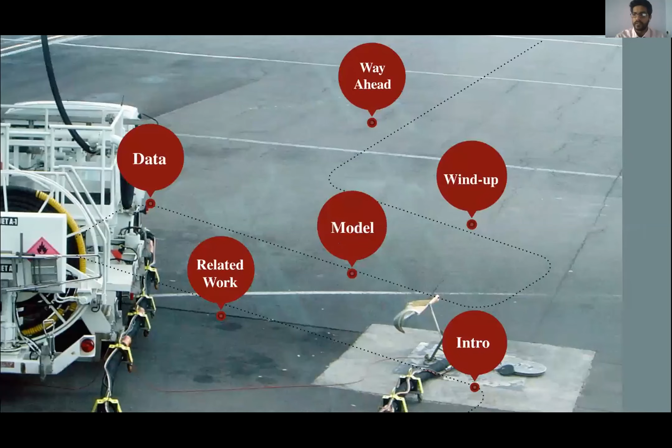Good afternoon, ladies and gentlemen. My name is Sridhar Ramanathan, and I'm going to present to you the paper on predicting fuel uplift for an aviation fueling company. The slide here shows you how I'm going to proceed with the presentation. This presentation is part of our curriculum for Great Learning, and my teammates here are Asmita, Revati, and Sudarshan.

Fueling an aircraft is also known as into-plane fueling services. There are two basic types of into-plane fueling services: one is hydrant type, and the other is Bowser operated. In hydrant type, we have underground pipelines laid to supply fuel to the aircraft, which are safe and can provide an unlimited supply.

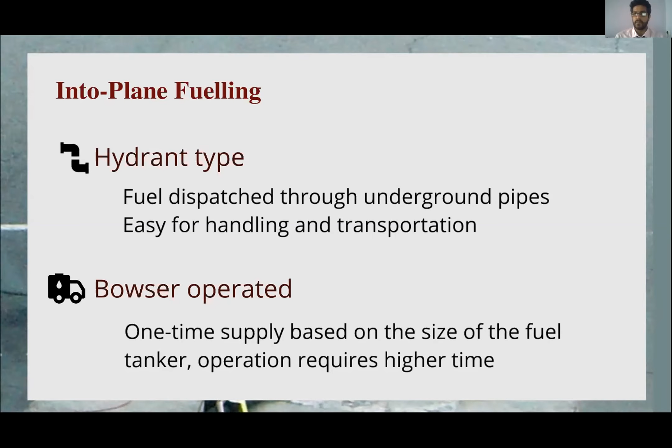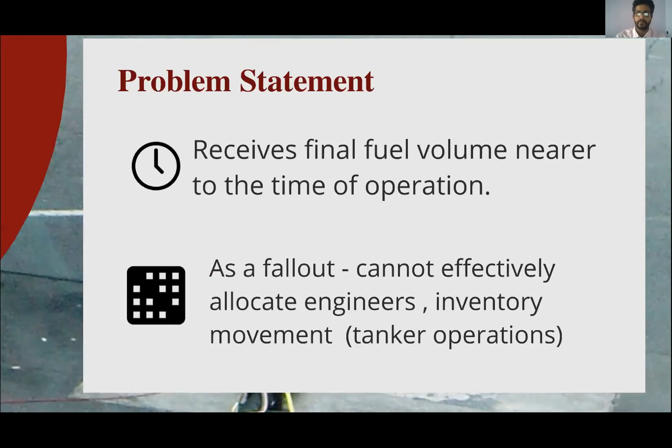In Bowser operations, the fuel supplied is with the help of tankers. The fuel supplied depends on the tanker size—there's 16 ton, 26 ton, and 45 ton Bowsers. The major drawback in this operation is that once the Bowser has gone and refueled an aircraft, a lot of time is wasted because the Bowser has to come back and top up its supply so that it can carry forward the next operation.

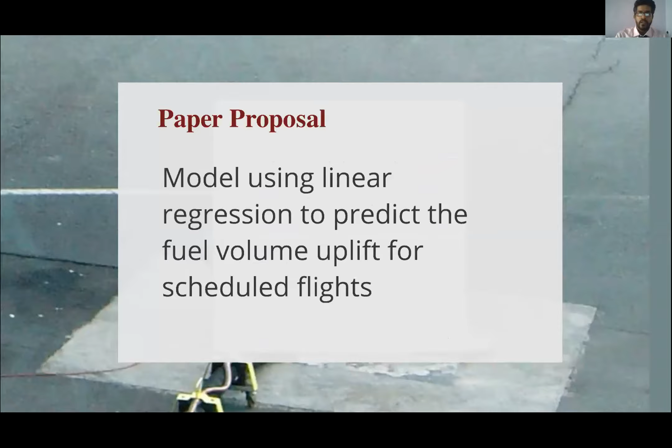Now the problem the company faces right now is that we receive the final fuel figure only at a time close to the departure of the aircraft. This makes it extremely challenging for the aviation company to manage its inventory and also to increase the efficiency of its manpower.

Our paper proposes to predict the fuel volume which will be uplifted by these aircraft, which are scheduled in nature, and we use a linear regression model to solve this.

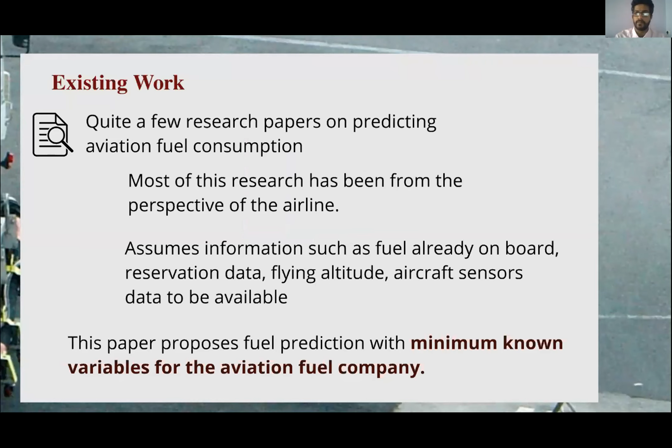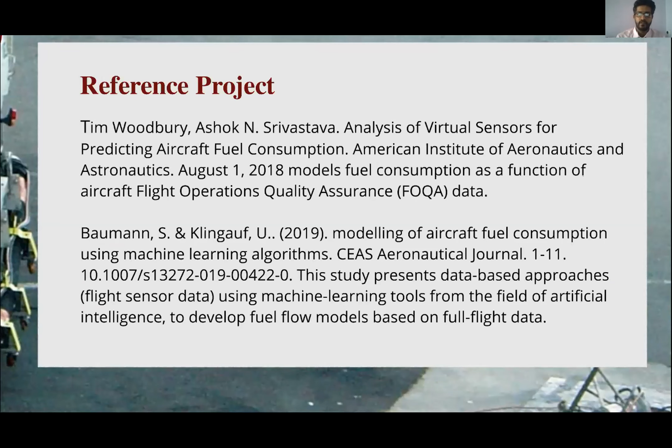Now let me explain to you about the related work in this domain. Existing work has already been carried out in terms of fuel consumption with respect to the airline, and the airline uses information such as fuel on board, reservation data, flying altitude, and aircraft sensor data which are available. These data are not available to an aviation fuel company.

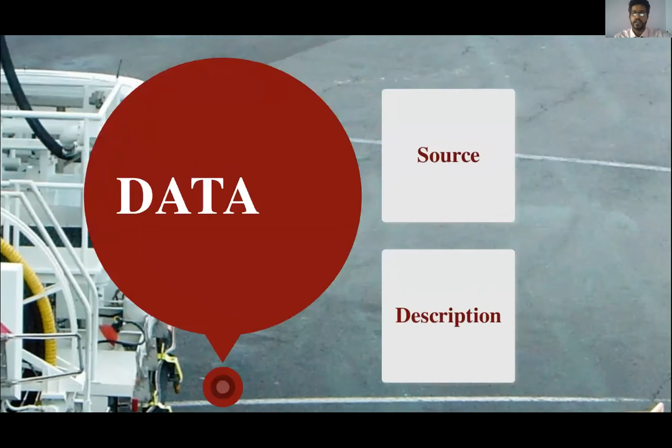With the minimum known variables, we are trying to predict how much volume will be uplifted by the aircraft. These two are reference papers which used aircraft fuel consumption as a pattern.

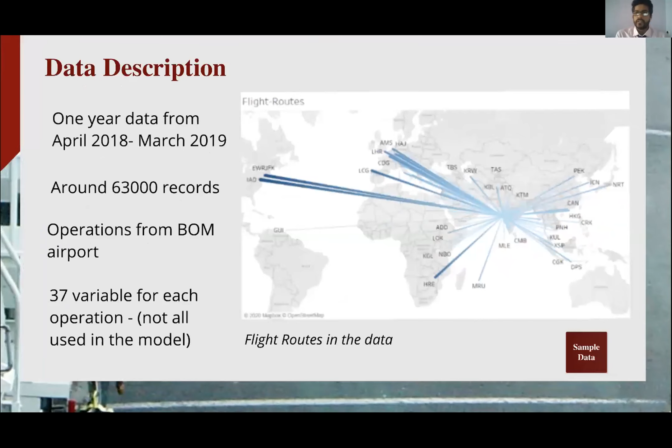Now let me explain to you about the data. The data here was collected from the company's custom software, which generally enters data from each fuel engineer after completion of one operation. The data here is for a period of one year, from April 2018 till March 2019, and uses around 63,000 records from a hydrant dispenser type of operation. The operation is based out of Mumbai, and we use 37 variables for each operation.

Now this here is the sample of the data which have been used for our analysis. These are the major predictor variables.

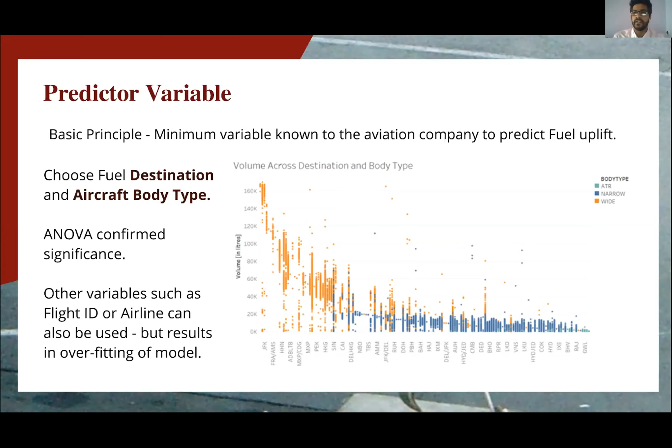Now let me explain to you about the linear regression model. Since the aviation fuel company uses only the minimum data available to them, we choose destination and aircraft body type as our main variables for our analysis.

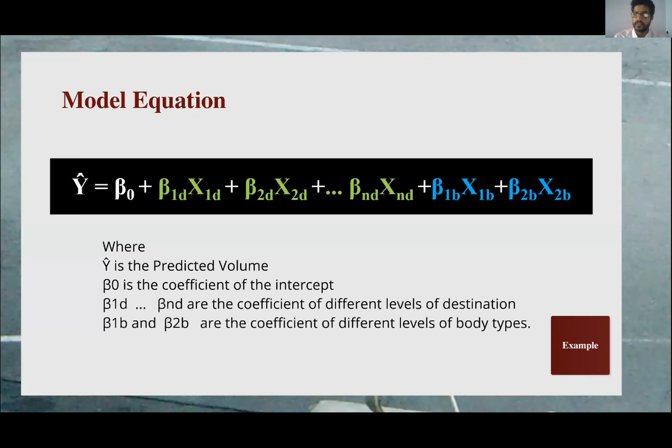We confirm this using an ANOVA. There were other variables like flight ID or airline which could also be used, but it resulted in overfitting of the model. Now this is the equation for our volume prediction.

Here, y hat represents the volume which will be predicted. Beta naught is the coefficient of intercept. Beta 1d through beta nd are the coefficients of different levels of destination, and beta 1b and beta 2b are the coefficients for different levels of body type. Now let me explain to you the interpretation of this equation.

Our model here was used to predict volume uplift for 112 destinations using different aircraft types like ATR. We consigned all narrow body aircrafts into one category and all wide body aircrafts into one category. So we used three different types of body: ATR, narrow, and wide. Now let us explain this in a little more detail.

A flight operating from Bombay to Delhi using an aircraft type like ATR would generally take around 2,865 liters, which has been mentioned here. We use Bombay to Delhi as a baseline for our analysis.

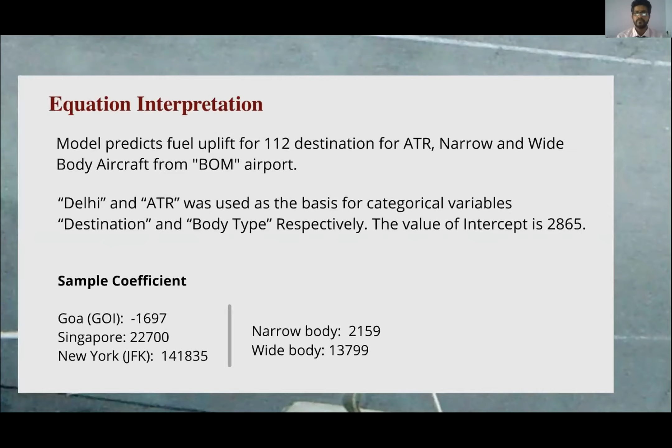The destination coefficient for Goa is seen here as minus 1697. This indicates that the distance from Mumbai to Goa is comparatively less than the distance from Mumbai to Delhi. You can also see that the coefficient for JFK in USA is around 1,41,835. This signifies that the distance from Bombay to New York is quite large.

We also found out the intercept for narrow body aircraft as well as wide body. The narrow body takes around 2,159 liters, and for wide body it is around 13,799.

Now the overall interpretation. When we use the ANOVA table, we found that the F statistic value for all the variables showed a high level of significance. Since the p value was less than 0.05, we considered most of the variables playing a significant role. We found that the multiple R square and adjusted R square is equal to 94%.

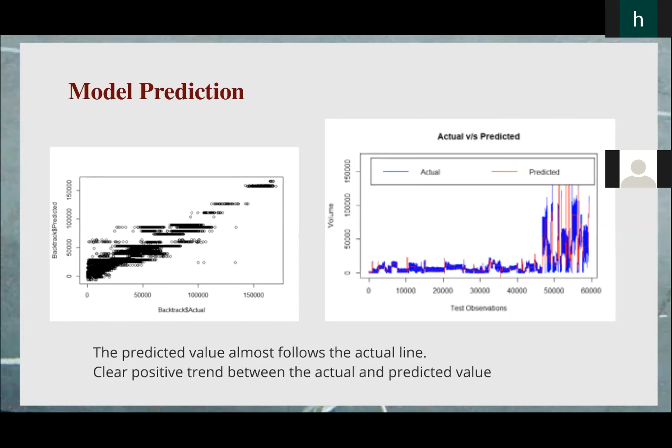This means that almost 94% of the data was validated with respect to volume. The model satisfies the assumption of linearity, and homoscedasticity was satisfied, though the residual distribution was not perfectly normal.

This graph shows us the value of volume with respect to actual and predicted. There is a clear positive correlation between actual and predicted values. In the backtracking plot, that is the second graph, it is observed that the predicted volume almost follows the actual line.

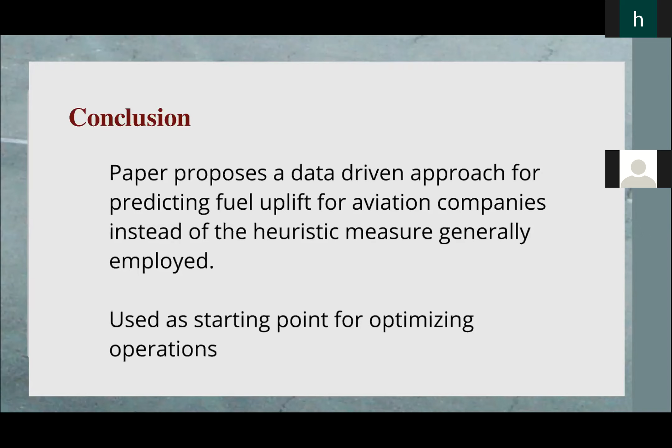I can conclude by saying that the regression model here provides us proof that we can use a data-driven approach to predict volume for fuel uplift, which can be used by the oil companies instead of the general heuristic measures which are employed.

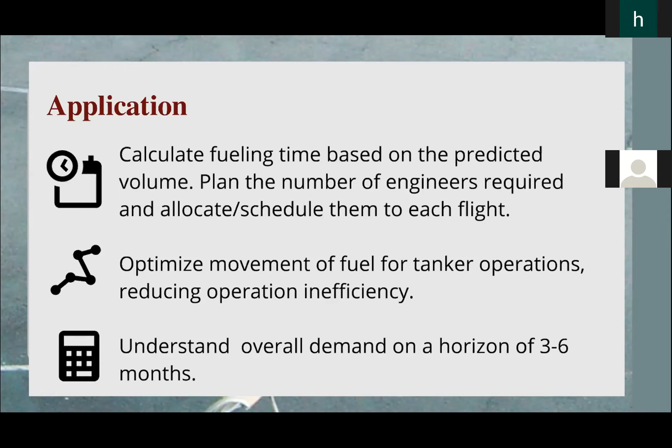The prediction of volume can be used as a starting point for optimizing shift operations. The applications for this can be used to calculate fueling time based on the predicted fuel volume. We can also plan the amount of manpower required per shift and also schedule preparation.

We can also optimize the movement of tankers, which will help in reducing operational inefficiency, and also maintain periodic maintenance and periodic checks. We can also understand the overall volume which will be required for a horizon of 3 to 6 months.

Now let me take you to the step of what can be our future goals. The work can be extended into many aspects. Since the model is generic in nature and not specific to the case study company, we can apply this across different oil companies across the globe and to different airports.

The existing study is based on one departure airport, so care must be taken that while applying this model to a different airport, you should study the flight pattern for it to be applied in a systematic manner. We can also use one model for every airport and a single point of reference for each departure and destination airport.